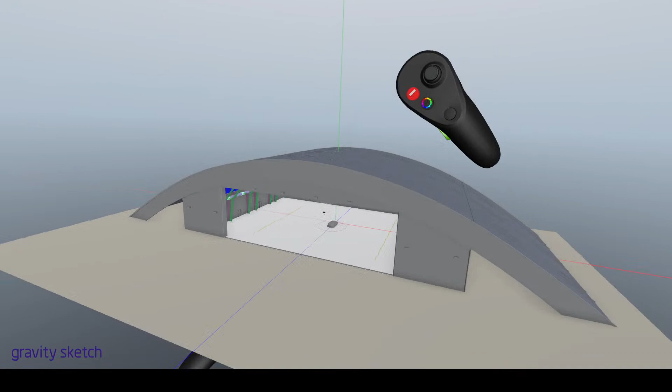The easy way to talk about this is car people and plane people seem to coalesce, and cars and aviation share a similar history of innovation. For me it's personal and professional. When you see something like a Monterey Historics and a Monterey Jet Center, a place where airplanes and cars are shown together, that was the inspiration. I decided to make my own style hangar, and I had already modeled an Airbus 220 Neo, I think, and I wanted a place to park it. So this hangar fits when the ring light is up at the top of the ceiling — it fits nicely, has a couple feet to spare.

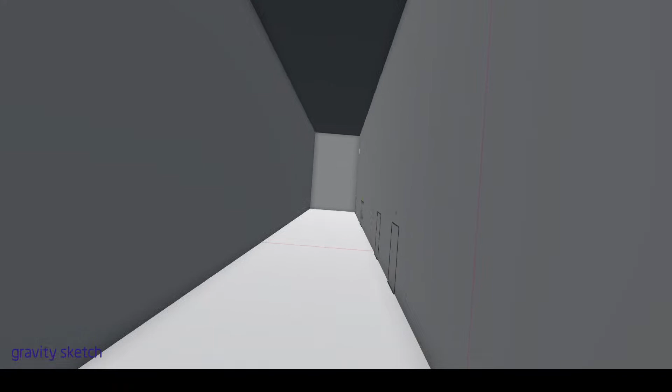Wow, that's cool. And it's got offices for you and I when we want to look down. Actually, I think there is some furniture. Oh, no, there's no furniture, but let me see if I can get that layer. Oh, it's all in one layer. I don't know yet if I have plans for putting in offices and things like that, but it is a fun place to shoot camera shots in Blender.

Yeah, I was just thinking that — I can't wait to see some renderings of this with lighting and everything, to see the scale of this in a realistic scenario. It's amazing. I can tell you it does look cooler in Blender, and that's just because shiny materials make everything look better, things like ambient occlusion and real-time reflection and all that stuff. But even now it looks cool, don't get me wrong, just the sheer scale.

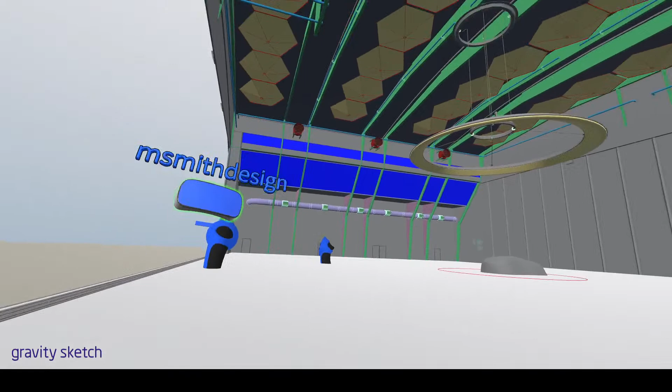If I just put myself at full scale, using the banana to teleport myself here — right now it's as if I'm standing in a full-sized hangar, which is incredible. The car looks like it's actually like 100 feet away, which is amazing. I'm trying to remember the wingspan of the Airbus, but this building is hundreds of feet wide.

So what was your inspiration for this hangar? Were there some references you were maybe pulling from? Did you just go online and find a few things you liked, some different hangars that you enjoyed, or was it something more specific?

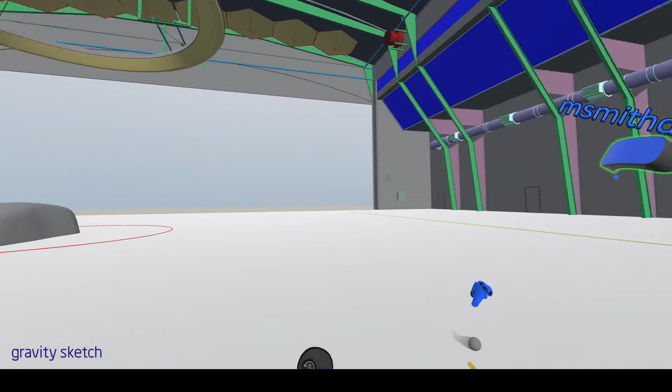Well, I wouldn't put this to the scrutiny of an architect just yet. I did what I thought was my due diligence in terms of the green elements being I-beam and steel. I'm weird enough that I pulled reference for things like what does an HVAC look like in a hangar, what is the fire suppression — which is all those crazy red things up at the ceiling that spit out foam. What I wanted to do was grab everything that felt real and realistic to a hangar, and then go a little further. So the lighting elements for indirect lighting, I haven't necessarily seen those, but I thought it would look cool like that.

To have instead of just row upon row of fluorescent lights, to do something a little different. The ring light is straight up, makes cars look cool in renderings. Right, because you can bring it down low, and you park the car on the turntable in the center.

There's no hangar that really has a turntable that I can recall, but things like exit signs and door handles, whatever it takes to make it feel real. I pull reference from old hangars and new hangars. I'd love for there to be more modern hangars, and I don't know if mine necessarily qualifies as super modern, but it looks very convincing.

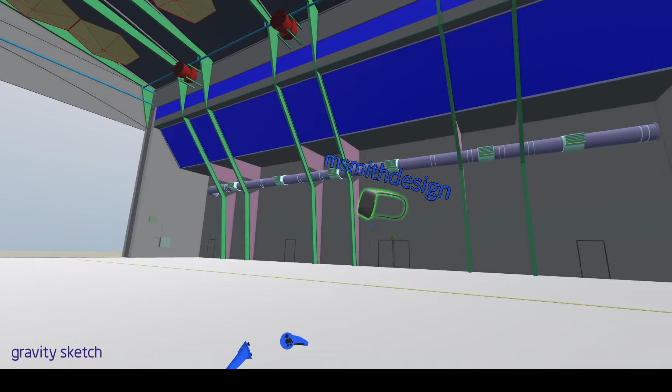I mean, so that's what I was wondering if you had some. What's that? That's a good word, convincing. If it can be convincing, then you've won half the battle.

It's like putting junction boxes and conduit, and lighting, and the piping for the water suppression system, and indirect heating, and whatever it takes. It's just time. And again, that sort of time warp effect of VR, you find yourself doing crazy stuff like those little cones over there.

But those are something that you would find in a real hangar, right? They put them on the wingtips, and they put them anywhere you might bump your head. And ask me how I know this. Well, it's because I worked at an FBO, and I had to clean hangars with the little mini Zamboni.

And so there's this personal connection, and that I think is what drives me in everything that I do to strive for that level of convincing. Well, it certainly does that, and it's really interesting that you actually worked in hangars. So you have a first-hand understanding of what it should feel like, what it should look like, the essence of a hangar.

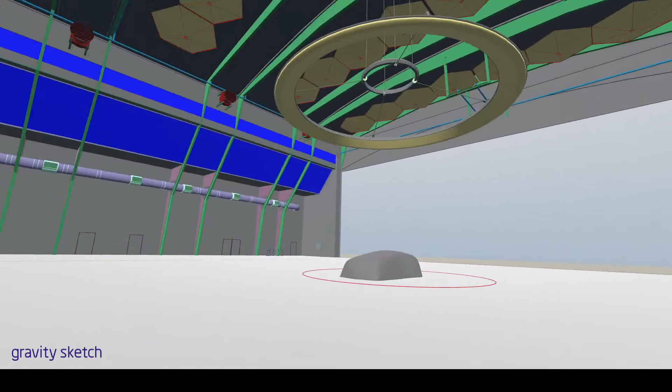I think the hangar I worked in, two of them could probably fit inside this hangar. Really? This is on a much bigger scale. We didn't service jet airliners, we serviced more general aviation type stuff up through business jets, but that's it.

Would you say like a hangar like this would be probably a very large commercial jet hangar? Yeah, again, the Airbus 220neo is maybe one of their smaller jets, but it's quite big, so it's definitely passenger jet size. This is incredible. If I build any bigger planes, I'll have to modify the hangar, but that's okay.

Well, I also clarify, you kind of touched on it a little bit ago, but some people might be wondering why all the different colors? And I think I know the answer, but I'll let you go ahead and answer that.

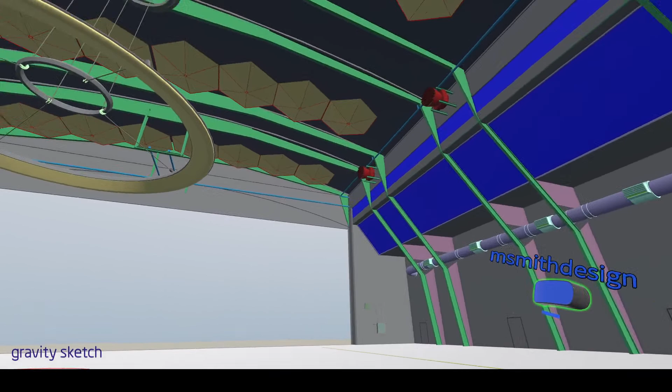Yeah, so that's workflow. It's way easier when you export into things like Sketchfab or even into Blender, having different materials grouped by common material, and then it's via color in Gravity Sketch. I know the same hexagonal light elements that are indirect is going to glow the same as my ring light because it's the same material. I can assign an emissive shader to it, and instantly I've saved myself a ton of selection work.

So it's a... sorry, go ahead. No, it's funny that you bring it up because it's been a hurdle in some ways in getting people into Gravity Sketch. There was a criticism raised one time that the colors look really cartoony, and that's because of how I'm modeling it. So I help myself, right, to get it into my, out of my brain and into the state of tangibleness, and then get it out of here into something that...

And again, to be clear, I don't necessarily need Gravity Sketch to be a full-on render engine, right? Its strengths lie elsewhere, and so these are the things that I have to do. It sounds kind of apologetic, but I like my crazy colors.

Yeah, no, it's great, and we've challenged people. I say, come at me, bro. We're in VR, you can't hurt me in VR.

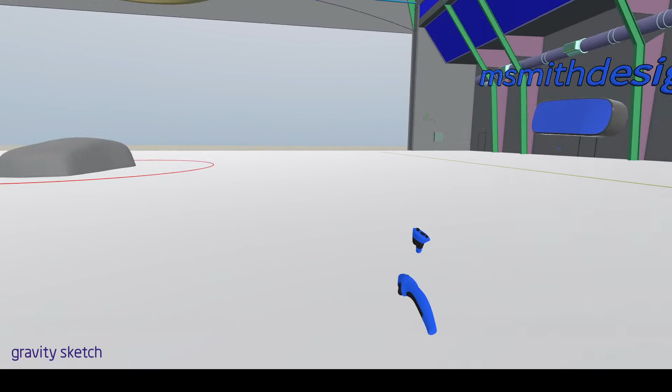Well, we've seen this workflow a number of other people have used. For example, Finrush Taylor, he's a designer, I think, for Adidas or Puma. Apologies, Finrush, if you're listening, I can't quite remember, but he's done a similar thing with his shoe designs, where he adds just different wacky colors to each piece of fabric on the shoe, just so it's easily distinguishable which piece is a different piece of fabric. So it's very logical, makes a lot of sense.

I discovered that Sketchfab has a 100 material limit, and the airplane completely obliterated that limit, so I had to come back in and consolidate materials inside Gravity Sketch just to get it to upload. But that's mostly on me, because I'm literally making green, then slightly darker green, then darker green with a bit of blue added. I'm always fragmenting as part of my workflow, which is maybe not the best way to do it, but that's the way I've done it. I don't know if it's the best way either, but it makes a lot of sense and saves tons of time.

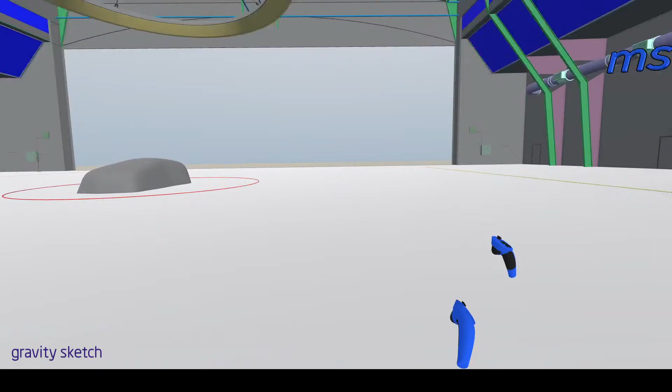I wanted to ask you too - I think you mentioned offices. Would that go behind the doors? Because I noticed there's another compartment behind those doors, behind the hangar. Is that where the offices would go? Well, the offices would be up in the blue glassed area. The restrooms would be along this area down here, and there's usually offices or areas for the maintenance guys. Then the double doors are access to whatever office space is behind that. In the arcing section of the front piece of the hangar, there are these open areas where the tugs and fuel trucks would go.

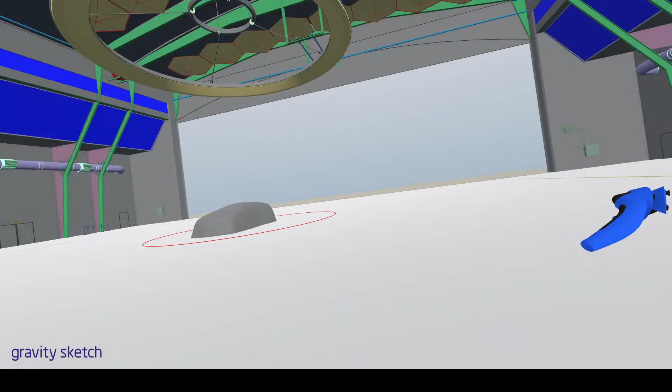Wow, I did not realize those blue panels would be glass - I'm envisioning that as transparent, that's really cool. If I ungroup this I can turn the opacity down. That's how in the default scene the opacity is turned down, so you can actually see there's a dude standing up on the catwalk there. Let me see if I can go look inside - oh yeah, that's cool. I keep thinking, am I giving these people enough space?

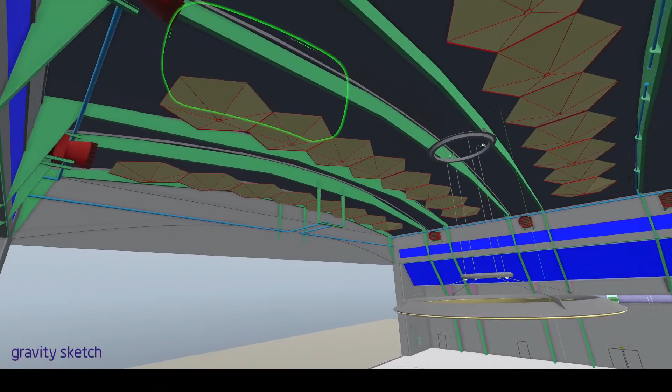Well, that is a huge space. Everything about the scale of this building is a little bit - it's more manageable when you have it in the palm of your hands. That's kind of where the malleability of scale continues to bend my brain, being able to squish this thing down to literally sitting in the palm of my hands and then zoom back to 100%. It's just the best. The beauty of this is it seems like your dream hangar - everything you want, size wise, function wise. It's kind of like you can make it whatever you want.

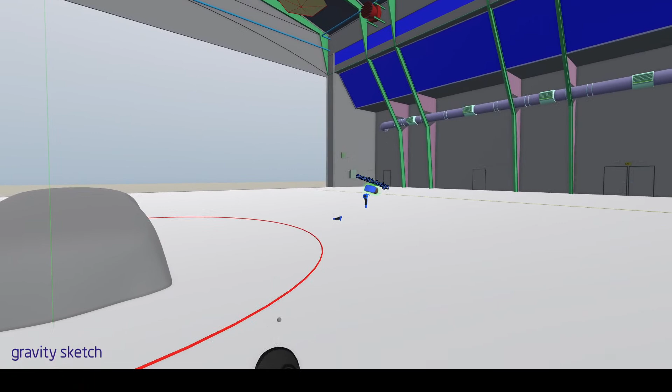I need to ask you something, just a technical question - everything's very nicely, orderly laid out. Were you using a lot of the grid function in Gravity Sketch to lay things out, as well as for the repeating arch of the fire safety panels. How was that done? A lot of it is the axis alignment tool, the functionality of lining up your controllers. And also the array snap feature that's now in Gravity Sketch, where I can create the offset that I want.

I don't actually think it's perfectly symmetrical, but the first two vertical supports are the same offset. Then everything about this is - if you're going to make it once, you're just going to copy it and slide it down, because that's literally what they're going to do in real life. They're not going to make a custom truss support for each one of these - it's just going to be the same thing times 8 or whatever it is. So yeah, it's just a lot of axis constrained movement.

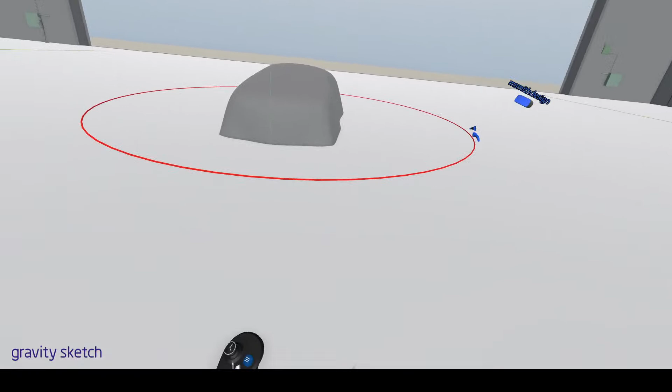That makes a lot of sense, because I've personally been interested in trying out more methodical, measured ways of working in Gravity Sketch. It just looked very precise, so I was curious about what your workflow was. But that makes a lot of sense.

Without any further delay, we've got a covered up car over here. What's that? I did a really bad job - I literally did this right before the session started. No, this is great, this is perfect, because we can make it like a reveal. Maybe if I start to delete, it's gonna dynamically show things as I delete stuff, right? Oh that's right, nice - so I'm just slowly... see, this is a new style of reveal that you can't do with cloth. This is awesome, a subdivision reveal. You're seeing it here first, everyone.

Yeah, I'm just going to delete it. That's going to take too long.

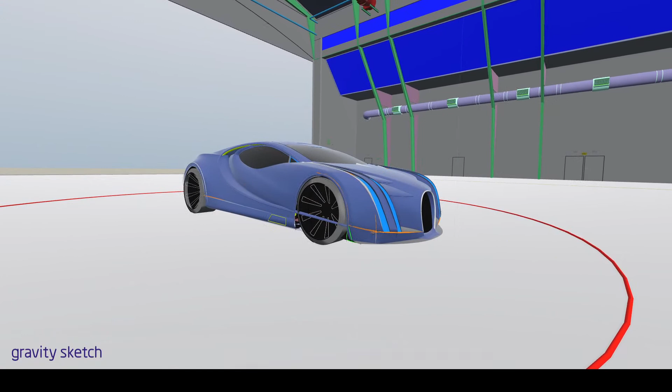So you want to talk about soak time. This car has been in the works for the longest of any project I've been working on, and it's because it's the one I want to get the most right. It looks amazing - in terms of the Zora thing I did and how many iterations I went through converting that from the initial sketchy model to the sub-D refined, that went through five, I think, major iterations. This thing is on a different time scale.

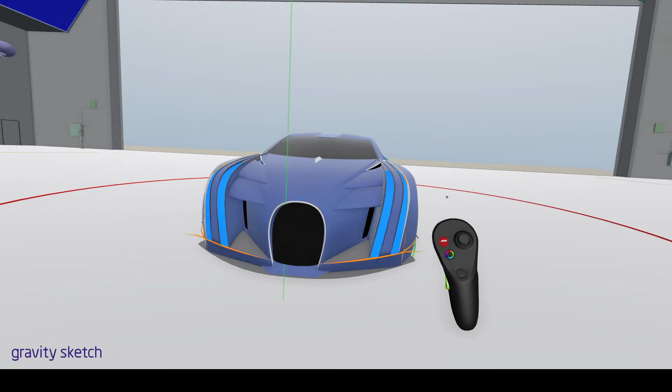And in a way it's the most fun, right? Because I think what I'm flirting with on this one is this idea of craftsmanship. And again, it's not a negative to say that sketchy is too quick - it's that sometimes the longer I've lived with this thing, the better it's gotten. And as long as I keep that trend going and it doesn't go backwards, then I'm going to be happy, and it will have been fun.

And I think the best thing for our viewers to understand is that I've never drawn any of these curves on this model in orthographic at all. Every curve on this car has been drawn in 3D and then checked in 3D. Not even 2D sketches - no 2D sketches, this is all. I could show you the origination scene had the sketchy model here, and I slid that forward, and I said I'm gonna try another one, and I have another one back here, so there's even two different versions of this initial sketch of this car. It's kind of crazy.

For example, this line right there is a line that I would challenge you to try and get right from the side view. The line that results in the side view is because I drew this line in 3D. And in fact, it even - I'm gonna break the...

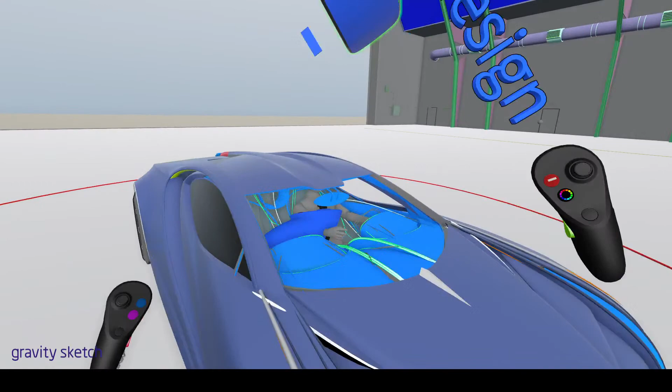Let me see if I can quickly throw some of this stuff on a layer, just so I can expose a little bit of the interior. You see that stuff links up, right? It's because I made my layer. All the stuff links up, it all relates, and you want to talk about spatial awareness and what we do as designers - this is where all the magic is, getting stuff to live well and fit a package.

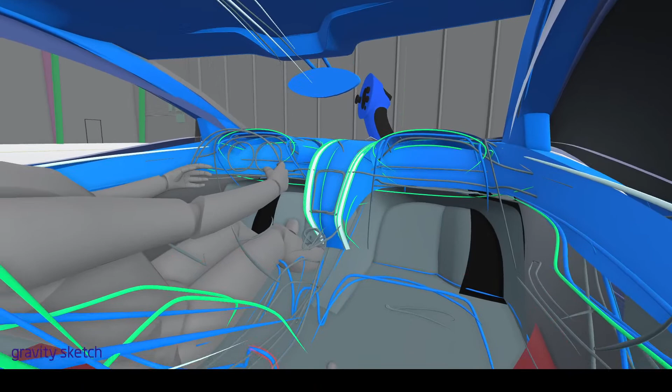And fit people. If you poke your head in, there's a frame in there in the back, which is just tubes at this point, but that may grow into something more exotic. Again, I think this one is the most labor of love kind of project, and the interior sketch was the first thing I did after I picked the winner of the three initial gesture sketches. So if you want to sit in here with me, we can go 100%.

I'll be the driver. But just the things that matter, it's all here, and the outside matters too. But just this idea of - and I'm being repetitious because I've said this all before, but it bears repeating - this is where people spend their time. You hook them, you get them in by the outside, but then you want to make sure where they live is great too. And that's why I started on the interior first before I even continued with the exterior.

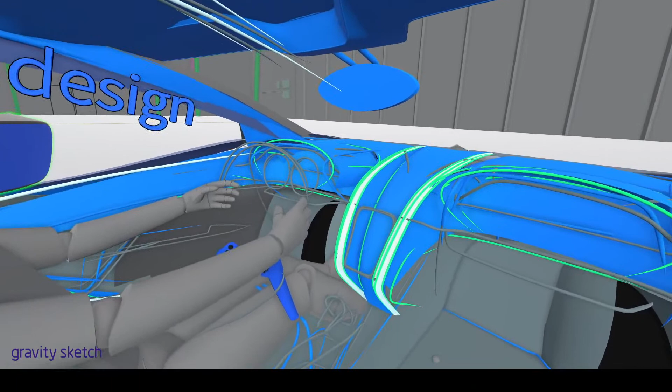And it's to make it a Bugatti, right? Make it look really authentic. And I can draw this because Ford doesn't compete in the market segment of Bugatti. And just keep it fun. I mean, this is - WIP, big time WIP.

I love this, I can see what you're talking about, about everything connecting, and it makes so much sense because when you're sketching cars on paper, you have to do a million little sketches just to see how things connect and how things flow into each other. Whereas you're solving all of that in this one work-in-progress model - one sketch essentially that you're adding on and editing consistently.

I didn't like where that mirror was, so I just moved it. Okay, yeah, but just the flow. I just love it - well, and also the design is just really cool.

I mean, the center console here, would this be some kind of screen? Yep, and it moves up and down depending on the driving mode, and that's cool depending on how frisky you're getting with top speed records and such.

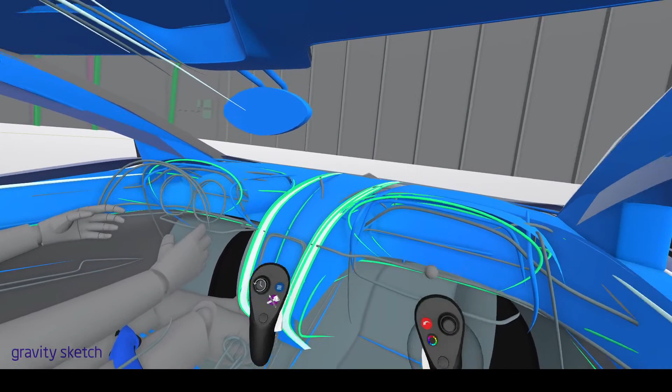Forgive me for not knowing some of the nuances here, but it looks like there's a display here, or an opportunity for the passenger to have some information displayed as well. I hadn't done that, but I like your idea, so you should start sketching what you want to see there as a willing passenger in an ultra exotic like this. I just love the symmetry of it.

It'll just be a grab handle. I'm not going to say the words because they're not safe for YouTube, but yeah. No, but go ahead, keep going.

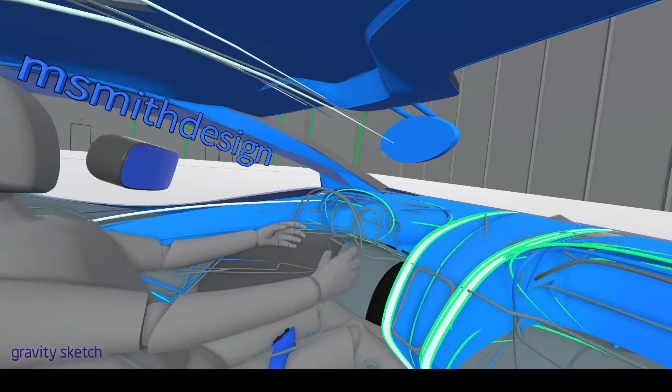I just love the symmetry of it, and what's surprising too—I had seen Bugattis for a while, and then I went to the Detroit Auto Show a couple years ago and saw one for the first time in front of my eyes, and I was very surprised at how small they were. They always look so large in images because of the large, voluminous shapes. I think that makes them seem large, but it's actually a very small vehicle.

Yep, and this is on package and on par with the vehicles they currently sell, in terms of wheelbase and track. I have some ideas for power plants that are decidedly off-brand for Bugatti, but maybe that's where the brand needs to be challenged.

Well, it certainly looks like a Bugatti. I mean, obviously you've spent so much time on it, but when I first saw it before we started the live, I just looked at it and it's like, yep, that's Bugatti. I could totally see Bugatti making something like that, but not now—it definitely seems like an evolution, like the next step of Bugatti.

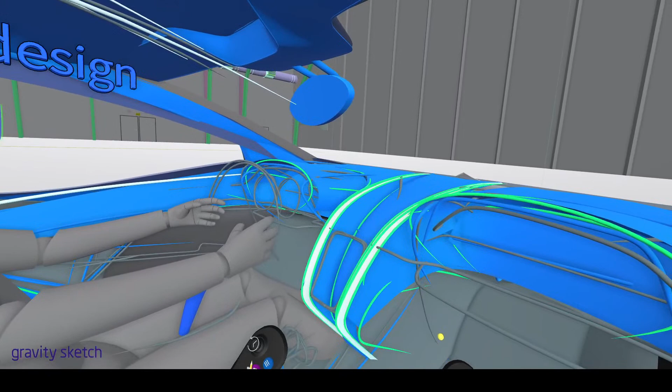Obviously, the goal of every designer is, what's the future of Ford? What's the Ford of 2030, 2040? What does that design language look like? You gotta have fun, and I hope everything I do looks like I'm having fun. If it doesn't, then I'm not doing it right.

Yeah, and just looking at this interior, there's so many—you've got blue lines, green lines. You can see the thought process, and that's just another thing. Not to get too nerdy, but you can see how someone's thinking and what someone is playing with, and so me, as a director, can come in and just look and say, okay, I can see what you're thinking here.

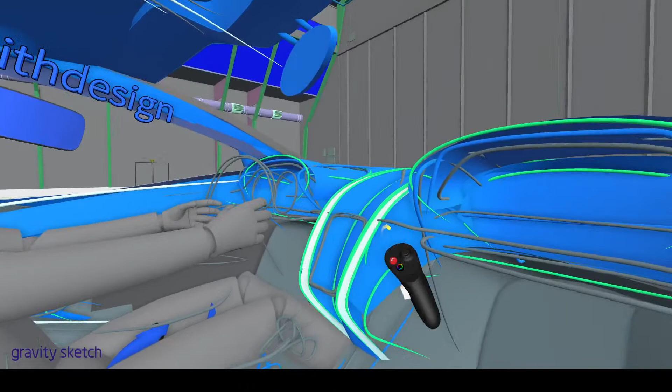Maybe we should go with that, or maybe if we just brought this up slightly, or accentuated this curve a little more. But you have that one-to-one, and you were saying that earlier, but it's just a perfect example of literally stepping into someone's mind almost.

I'm glad you mentioned the colors, because it's not just about differentiating one line from the other—there's a temporal aspect too. The less saturated the line, the older it is. So the gray was probably the original, then blue, then green is kind of the crazier colors, and those are getting more and more honed in on the direction I think I want to go.

To your point—and this is kind of a riddle I've talked about with students—as we get into this bold, digitized future, and VR is going to play a part in that, how do you keep track of or archive this as a thought process? In Gravity Sketch, it's on layers, and thanks for making unlimited layers, because now I can put all these colored lines on layers and say iteration 1, iteration 2, or week 1, week 2, week 3, whatever. Or day 1, hour 1, whatever time scale you're going to work on.

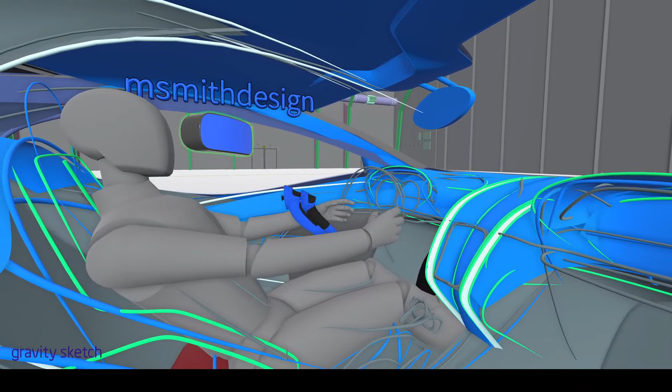Even extending that out—certainly from where I came from, a year or so ago, before this position I'm in now, recruiting—I can't wait to, quite literally, you're an employee of Gravity Sketch so I can't have a job interview with you, but I fully look forward to the day where this is the job interview I'm going to have.

That's something I never really thought of until you mentioned that, but it's so true. You could literally just sit virtually and show, hey, this is what I'm working on, this is what I was thinking when I was doing this.

Yep, and I look forward to that day. How close do you think, how soon of a day do you think that is? Within a week. Wow, that's amazing.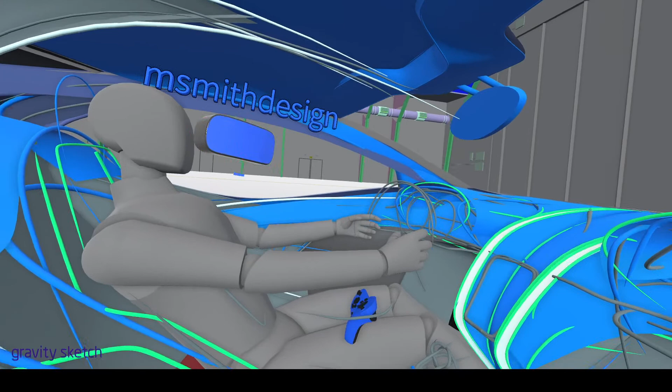It makes total sense, especially from a designer's perspective, a recruiting perspective. Well, and again, it's so funny because I have a lot of these.

I've been having all these amazing conversations with Brian in footwear, and that turned into my new pal from Australia, Bezo, who we talked a lot about in co-sketch, a lot of wild stuff. He's an architect guy, so he's going to actually give me a critique on another house project I did. It's a dream house, kind of an 'if I won the lottery' thing, there's pictures of it on Instagram. It'll be fun to have him tear my house design apart since I'm not an architect, and hopefully defend my choices but also hear and improve it.

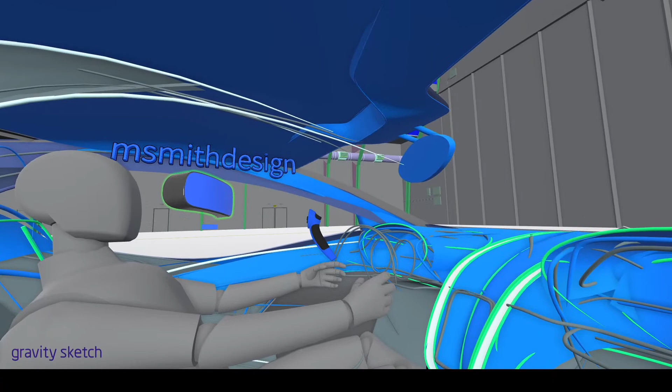In the same way, we've already taken advantage of co-sketch and VR for internships, where it's way more interactive and, I would say, productive, to be able to get your hands dirty without literally getting your hands dirty.

Messy in a sketch, right, before you get too far along. The riddle I've had these conversations with various people about on co-sketch is, how do you replace the sketchbook? Because when we're hiring people, man, we still love sketchbooks, because that's quite literally the best way to see how people think. Can you turn a car around in your head, and can you then get that on paper? Well, what's the new equivalent, right?

What's it going to be? I would argue it's this, you're in 3D. We're going to make 3D cars eventually. I want to see how you can do with 3D stuff. That makes sense, anyway, that's my personal opinion.

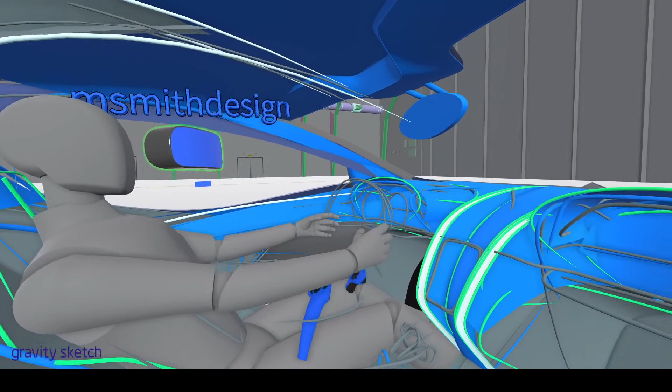No, it makes sense, and I've thought about this, it's been a subject of discussion in school when I was there, talking about sketching versus 3D. As you know from Matt Whitby, working with him, VR and Gravity Sketch was very much part of the curriculum, and there was, I think, a constant back and forth, at least on the student side, of how much am I sketching versus how much am I just jumping into Gravity Sketch and spending most of my time there with 3D line sketches in VR.

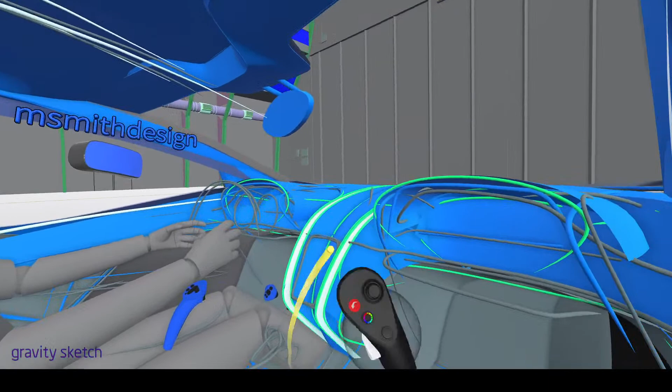At the end of the day, the conclusion we all came to was, if it's communicating our concept and it's in 3D, then that's even better. It's doing what 2D sketching historically was supposed to do, which is communicate your idea in 3D. But now, obviously, it's just the next evolution.

You can still go back and forth, right? There's doing a 3D doodle, then drawing it at the breakfast table, making refinements and adding them back, which is completely backwards to the concept. Or I've done ones where I did the full car and then finished with renderings in 2D, because I live in a realistic world where people expect you to have stuff up on the wall. That's fine, it fits within that entire ecosystem of creativity.

Well, let me ask you something. I think that shouldn't be intimidating, I think it should be emboldening for people to just get into it, just try it, see where it fits in your process. If you're the person who likes to just take it this far, awesome, that's all you need to do. Just take it as far as you want to go.

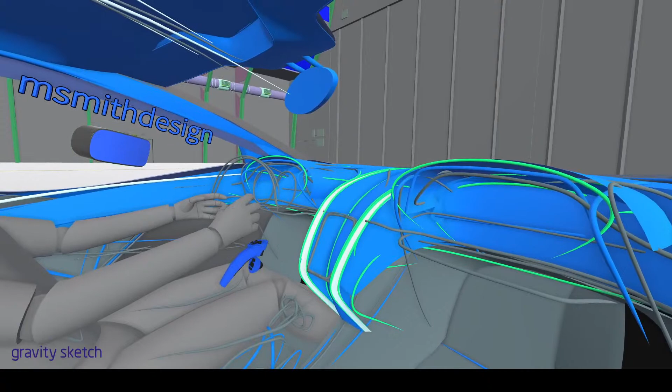Yeah, absolutely. Well, it kind of makes me think of something, and I'm curious to get your thoughts. Do you think that there's a stigma of using VR in the automotive industry?

I think it probably translates to other industries as well. But just out of your own personal experience, because you mentioned people still like to see 2D sketches, which I love. They're pretty to look at, right? But you did say earlier that we don't manufacture pretty images, we manufacture cars, 3D cars. Is there a stigma, do you think, to VR and this whole new sort of tool that's emerging?

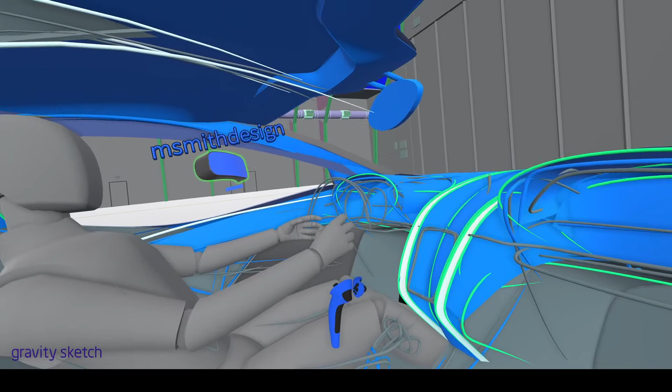I would say if there's any stigma, and I'm trying to think if stigma is too harsh of a word, I would think stigma might have applied before March of this year. It certainly is, not too surprising to hear that COVID-19 has really drastically altered lots of different landscapes. Because of the inevitable shift, and the way we're finding successes in virtualizing more of our process, the stigma, if any, is crumbling.

I would say if there's any sort of stigma, it's just that sometimes people see new as risky, and then others see opportunity. I think it depends on what your mindset is. I was certainly in the mindset when I saw the first video that Gravity Sketch put up on YouTube, I said, I got to play with that. And the next day I emailed Seyi and Daniela, and they said, let's have at it. That's been a crazy roller coaster ride to here until now, and it's going to just keep going as far as I can tell.

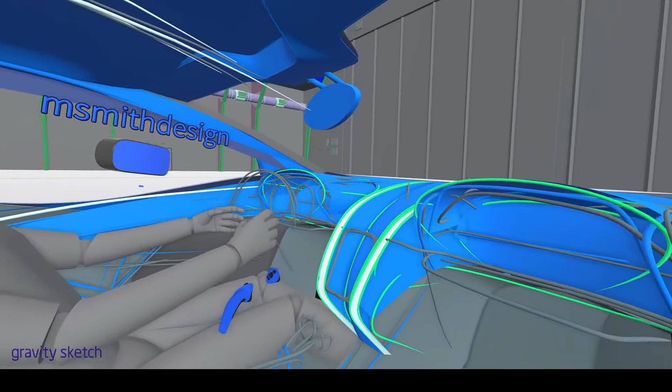It's incredible. You mentioned some landmarks there, COVID-19 obviously, and I think the Quest has definitely piqued a lot of more people's interest in VR in general. But it makes a lot of sense.

Well, go ahead with that, right? Because you mentioned it, there's a lift, a lift of computer and hardware, software in some cases. And I think what Quest represents is the lowering of that lift, because it's this untethered HMD. You just pop it on your head, and now you're off to the races.

I certainly love the idea of hopefully when we get back to traveling around and talking to our customers at different events, to have that on an airplane, because now the bosses love that too, right? Because you can keep being creative, because the security is inside your headset, versus you can't work on a laptop, and sketching in an airport is not really condoned. But that little pivot of, well, now the creativity is next to my eyeballs, again, it's a chance to rewrite the script.

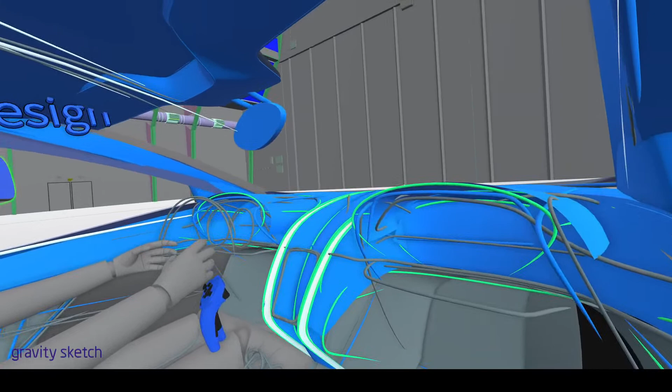And I think, if COVID has any silver linings coming out of this, it's let's take everything we've learned and really thoughtfully change the way we do things.

I think you're exactly right. We actually saw, funny enough, someone tagged us in their story on Instagram, and they were literally sitting in an airplane using the Quest, doing some sketching. And it's just as soon as someone does that, it breaks the barrier. Everybody's like, all right, we can do it on airplanes, and people realize it's anywhere, you can be anywhere and do this.

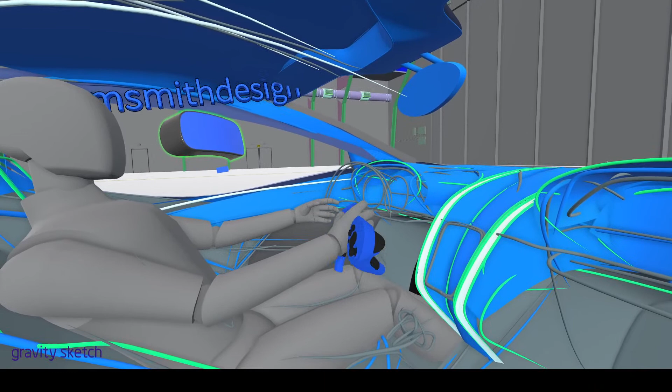And I think if there's any sort of company level stigma, it breaks down as societal acceptance gets bigger too. So the acceptance of Quest and the broadening of people's VR horizons with a product like that is only going to help lower any perceived barrier. I feel weird thinking, if I bring the Quest to spin class, what are people going to think of me? But a lot of times what I tell people is, look, we're in VR, I have no idea what people are looking at me, or I could care less, because I'm having fun.

And I think that's what you always have to go back to, as soon as it's not fun. Absolutely. And what's funny is, just to tie it back to sketching, I felt that same way whenever I'd be in the zone sketching on a piece of paper. I just kind of would zone out my environment. And with VR, obviously you're covered up so you can't really look around, but I think it just further reinforces that focus mode that we were talking about earlier. You're just in your own world of creativity, making things, and everybody will see, hopefully at one point, what you've been up to.

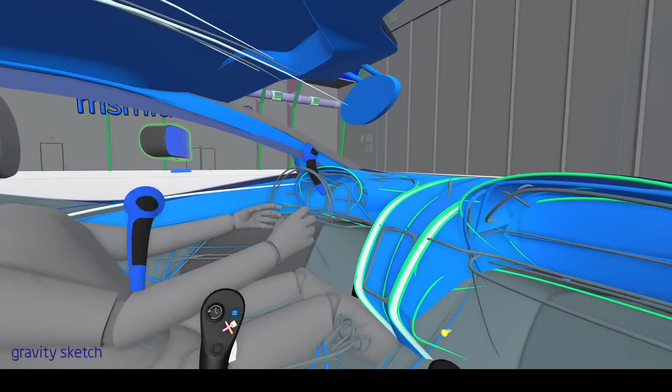We've been talking, but I know you have some other stuff you wanted to show. Let's pull the airplane in, since that's a completely different mode of transportation. I know people would love to see that, since you had it in here earlier when we were getting prepped, and it was so cool.

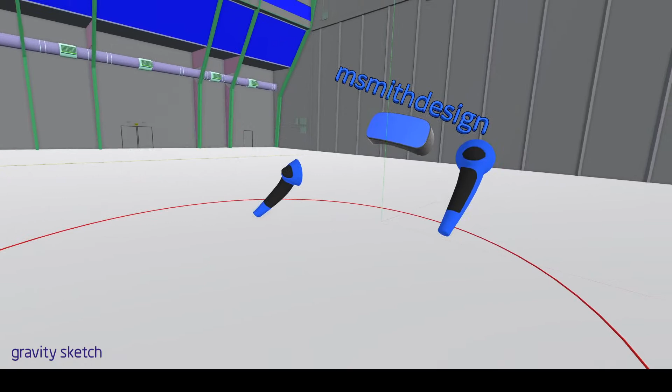Let me lock this layer so I don't delete the hangar. I want to delete this because of the part count — I think it'll help the loading of this airplane, because I went a little crazy on buttons and also used the text tool, which creates a lot of polygons when you make text.

And it's called RV. So continuing with the theme... I'm just going to make sure.

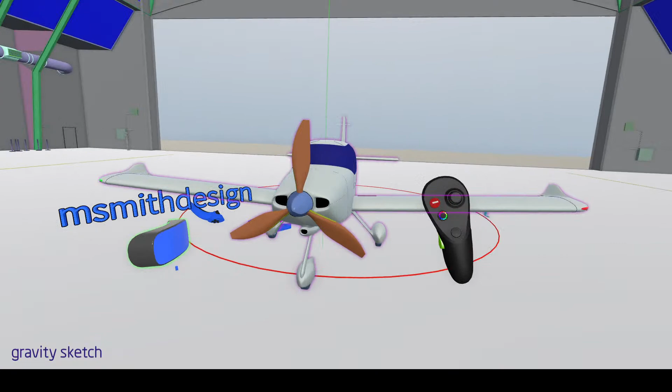Beautiful. It's a little nose-low here, so let me tilt the nose gear back. There, now it looks like it's on... let's see, do I still have that layer? Yes, I have it, so I can put that onto that layer. Actually, we could do it as slightly transparent.

I love planes too, as well as cars. If you want to talk about continuing the theme of dreams, this is a dream airplane. This is a Vans RV-10.

I'm going to delete these because I have these crazy polygons here — oh man, it just moved them. This is an emissive surface when I take it into Blender, because it's not a real digital screen, and I can give it a glowy effect.

But if you want to talk precision, I'm going to say I haven't seen any other 3D model of an RV-10 that's this dimensionally accurate. It's down to the actual instruments — there's an avionics company that makes this, and when you have good reference, you can make good models.

These are the actual screens, right? It's all dimensionally correct. The only stuff that's unique is because the RV-10 is a kit plane — you build it in different sections, and things you have creative control over are stuff like the layout of the instrument panel.

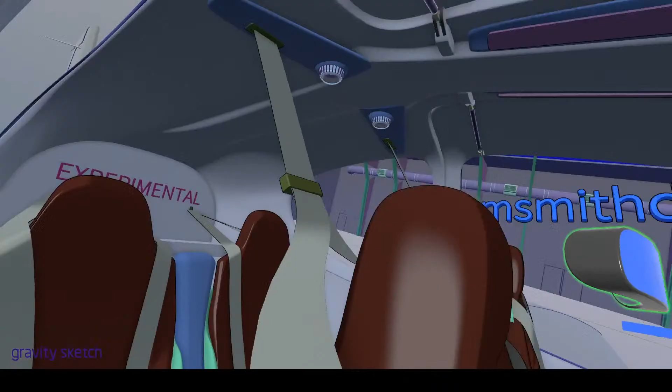If you zoom in here, you can see I'm cheeky as well — there's realistic low fuel, master caution, battery merge warnings, and an eject button in this plane, even though you don't want to eject in this plane.

In terms of what this is good for — this is good because I can get my wife into VR and have her sit in this plane and say, wouldn't you like to have this plane to fly you, me, and the kids around the country? It's a selling tool, a sales tool, exactly.

Because I want her to have a realistic experience, I'm the guy who puts the static wicks out on the wingtips, and gives them a little bit of droop because gravity is a force we have to contend with.

Down to the last detail. Yeah, this is awesome. I'm a little bit crazy. You can check, there's actually LED lights here in the wingtips.

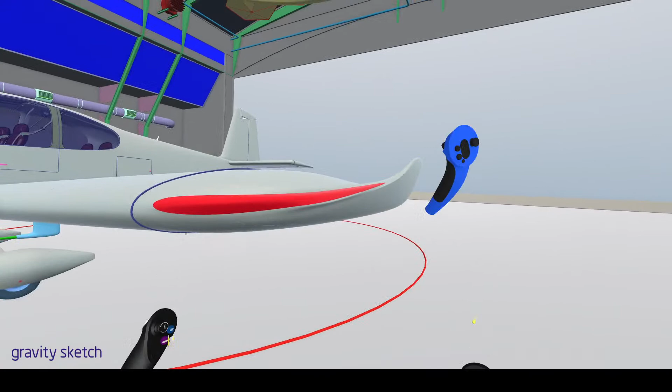Yeah, wow. And again, so the wingtip, from this cut line outboard is stuff you can do whatever you want with. It's the stuff inboard of that you can't mess with because that's all strictly aerodynamics. Well, right. I sat here and said, I like the look of the wingtip on a Diamond DA40, and I like the look of the lights they have on a Cirrus SR22, so I smashed those together. That's awesome, it's kind of a hybrid lighting scenario and wingtip, right?

Yeah, it looks so cool. I've yet to get this into a wind tunnel, but my hope is that it's going to give me a little bit extra cruising airspeed. I mean, just visually, it looks very aerodynamic. It's awesome, I love it.

I was going to comment that the lights looked really cool, integrated into that sort of swoosh shape. But I mean, I'm just amazed at the detail of this. I saw this on Instagram when you posted it, and of course the renders are great, and you get really into the details and show the interior. But just until you get in VR and really start looking around, it's amazing.

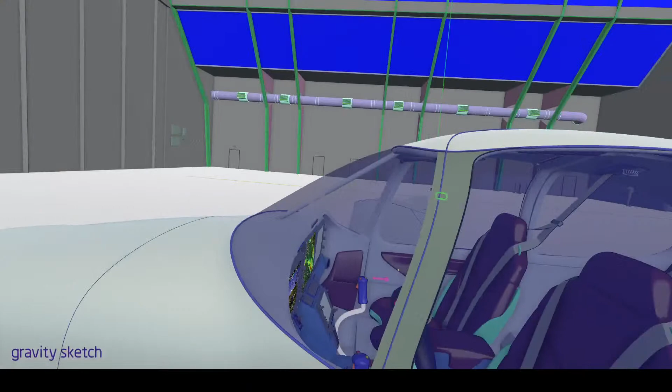And you were kind of touching on it earlier, but the customizability of these planes was one of the main motivations you had for taking on this project, right? Because you knew that every piece you could control. You could somewhat have a version of this in real life. Yep, in real life. Yeah, indeed. And which is just awesome because it's a validation.

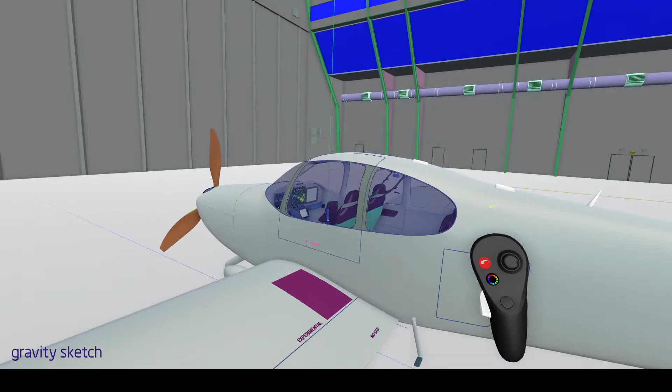It's complete one-to-one, 100% validation of what you could do, and basically see it for yourself, and be like, yep, that's what I want. And then obviously the next step is to make the move and get the same thing. But I have my fingers crossed that it's the same effect as the basement, the same effect that we anticipate and we're trusting is going to happen with the cars that we do.

It's this, you've lived with it before you've lived with it. Yeah, exactly, that's what it's all about, right?

We haven't even gotten into this idea of when I put on my HMD and want to do something design-wise for somebody else, I'm in fact gaining empathy for them just by virtue of putting the HMD on, because I'm now experiencing this object through the eyes of the customer, in a way that is completely different than sketching on a piece of paper. Yeah, the empathy, that's another good point. It's the empathy aspect, and just understanding, one-to-one, what's going on basically.

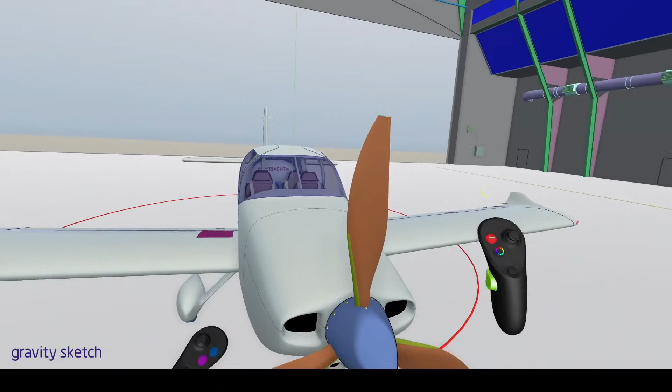So if you check out my Instagram, you'll see I've already started it. It's somewhere on the coast of Oregon. I took a screenshot from Google Earth of a straight-down view, and then I wrapped that onto a texture onto a subdivision surface. And morphed it and added points and made it into topography, best as I could guess for what this actual coastline of Oregon looks like.

And then I was like, okay, now I've got to build my house here. And then it's a two-stage, it's got like two levels. It's bonkers. And it's all one-to-one.

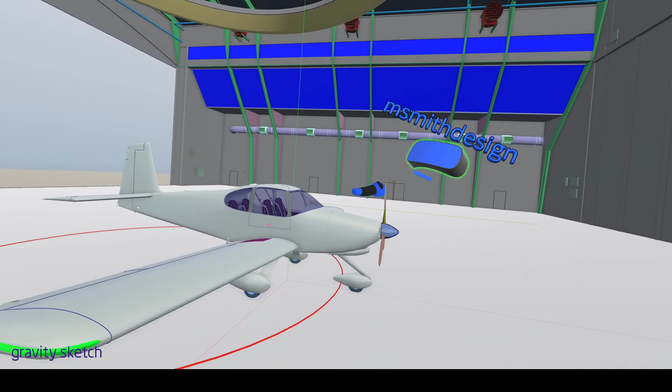I can't wait to report back my progress with Bezo, who again is an architect, and he's gonna pull me back and bring the reins in to say this is obviously the work of a creative, over-creative mind, in terms of what you can get away with. But it's the same thing as kids when they just start sketching cars—have at it, have fun, and when it's time, you'll have the level of realism added to your skill set, you'll need to get a little bit more realistic. And at this point, I'm just a newbie, wannabe architect until I gain additional knowledge.

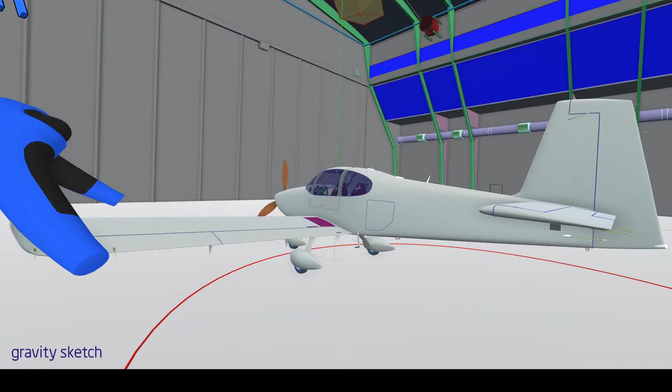I can share with you, I had my first session designing a shoe with Brian Rinella from Reebok, and holy moly, I learned so much in that session. Not only the semantics and the terminology, but just to have him, as I'm moving stuff, say, I don't know about that, or you might want to consider moving this.

It was completely mind-bending, right? Wow, I'm not a shoe guy, but I had a sketch that I did many years ago, and we're going to have a go at it. I'm going to learn a lot, and then the thing we do together in co-sketch is going to be a result of that. It's going to combine both of our brains. It's going to be absolutely wild.

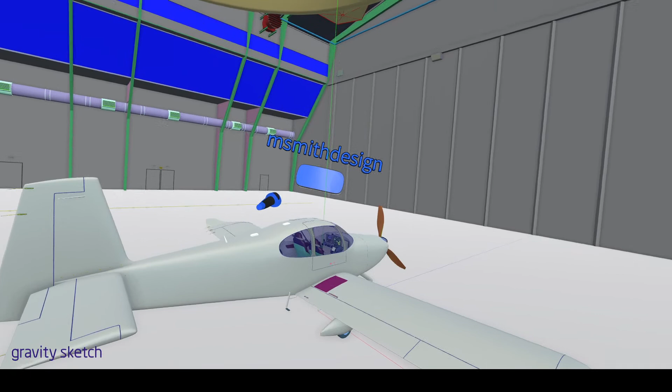But that's such a cool thing, working with someone who has expertise in another field, learning the ins and outs and the terminology, the lingo. It further broadens your repertoire in design and your ability to express yourself in more ways. I'm sure you learned things, even from shoes, that you could translate into automotive as well, ways of thinking. And for the person who made the comment about the dream house, once I go a couple rounds of boxing with Bezo and we clean up my design, maybe he and I should get into a co-sketch session and he can tour the house. Yeah, absolutely. Well, hear that, Calvin Kim. That's an open invitation.

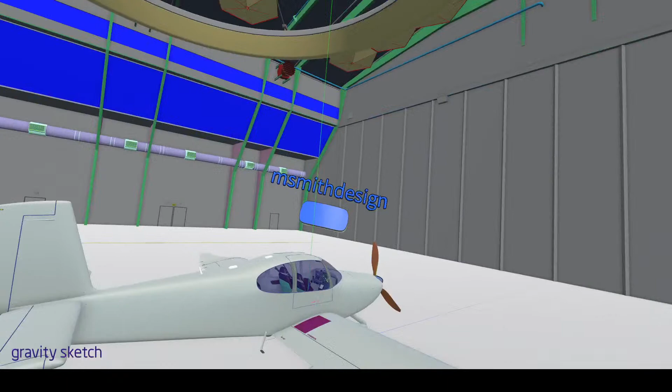That actually brings up something too. If you're ever interested, it would be cool to have a live sketch session with you as well on our Live Sketch Wednesdays, whenever it fits your schedule. It would be super cool to have the community learn a bit about how to approach vehicle design. That's something I've been thinking about, haven't actually brought it up, but we can maybe do that in the future. That's another example of why this co-creation is so powerful, you get these cross-platform, cross-expertise experiences. Somebody can come in as a shoe designer, you as an automotive designer, and see what happens. Extremely powerful.

Let's see, there's someone else here. I think the same person, Calvin Kim, says, 'Stay tuned with my channel, I'm making the new Bronco in an extreme detail version. Hope you get to see it, Mr. Smith.' Cool, yeah, well that's cool too, I can't wait to see that as well.

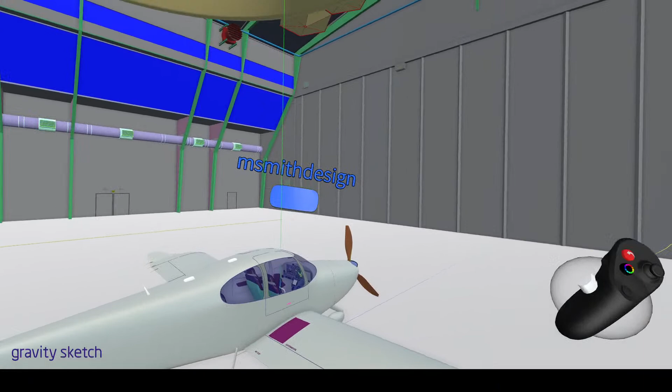Let's see. Okay, John35 says, 'Does he make this only using reference images? Because the details are amazing.' So I guess they're asking how you executed this model in Gravity Sketch.

Yeah, so I tend to make a reference room. If I'm going to make an airplane, the style in which I make it is different than I might do a car. Because a car, I've done from a front three-quarter, from side views, it doesn't matter, it sort of absorbs any technique. To do something dimensionally accurate like an airplane and really get it right, it would be considered more box modeling, having lots of orthographics.

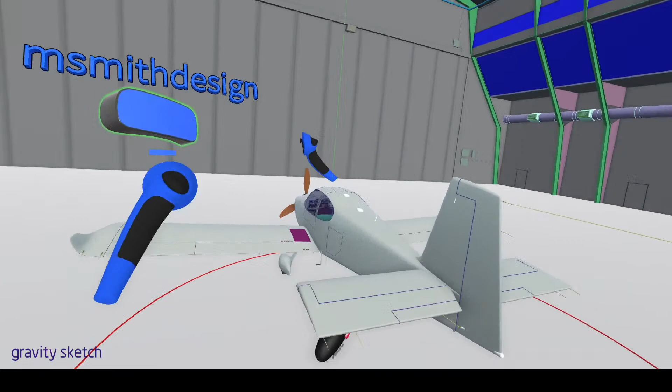It was all available from Van's, and wow, the aspect of this being a kit plane is that there are many people currently in the process of making one of these airplanes. If you want detail pictures, it's all there for you. So many people document, and you can read their build logs down to the rivets, you know what I mean? In terms of knowing this airplane, having created this object, it's about having done the research.

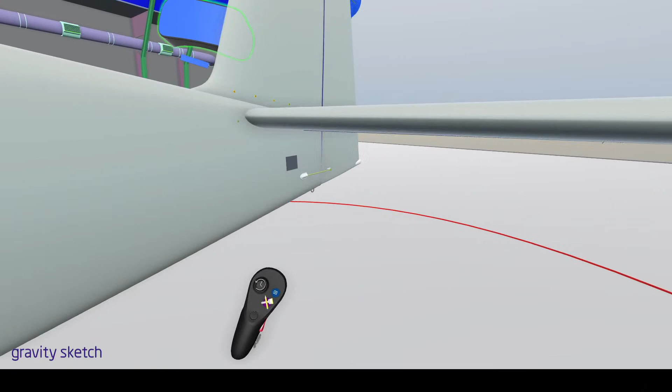This is typically what people build first, right? Is this or the vertical stabilizer? Yeah, and how it's all riveted together, this is all aluminum, and then there's this collar of fiberglass that goes around it, and it's screwed in. That's why there's screws there, right? And so the detail is all emergent from the process used to make this plane. But yeah, a lot of orthographics and a lot of pictorial reference.

Again, there's a wealth of it in the world in terms of this type of airplane, because there are people making tons of these all the time. Wow, that's incredible. It's always easier when you have just a wealth of evidence or reference like that. That way, there's not much left to interpretation. And then the beauty is that when you have all the reference, then you can interpret it or change it to your tastes, as you've been talking about.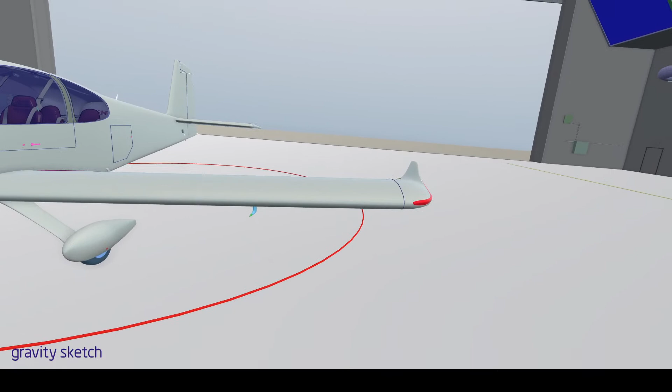And that's, again, the examples of the seats, the rudder pedals - they sell a bunch of different styles of rudder pedals. It's really fun, the control stick. There's guys that put full-on fighter pilot style controls on the yoke - it's not a yoke, it's the control stick. And each one is different, and that's what makes them cool. They're different but the same - they have the same bones.

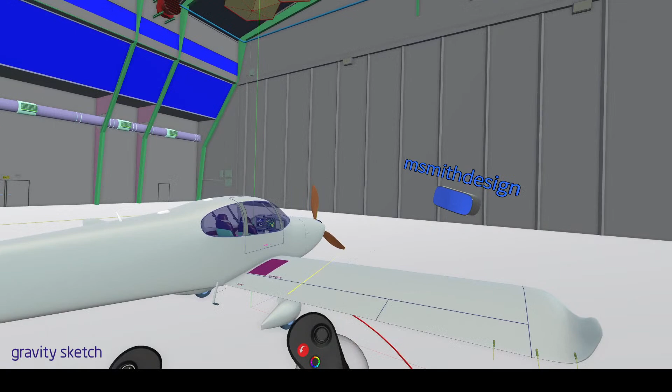I'm gonna have to look these up, because I actually wasn't familiar with these airplanes before I started talking to you about it. But I've also been into planes throughout my life, just externally - I'm not an expert, but my grandfathers were in the Air Force, and I think hearing their stories, talking about their times flying around the world, and their favorite planes, it just got me super into it.

I love the world of flying and the flight and just these machines that are very beautiful but completely driven by engineering, and functional pieces of art, and just looking at this plane and getting into the details. You really appreciate, as you've already mentioned, just what it takes to put something like this together and what makes these things work.

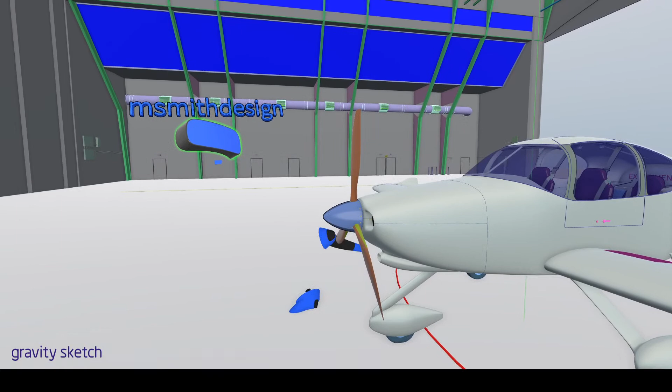And I would say airplanes is kind of a nice thing to be enamored with, in terms of where this is all going. As we get towards full BEV - battery electric vehicle strategy - sorry, I'm not trying to use acronyms - when you go battery electric, the things you need to worry about are aerodynamics and weight. Well, guess what's been worrying about aerodynamics and weight forever? So to know these things, to know these objects, is only going to help you in terms of the pool of reference you can draw on in your brain.

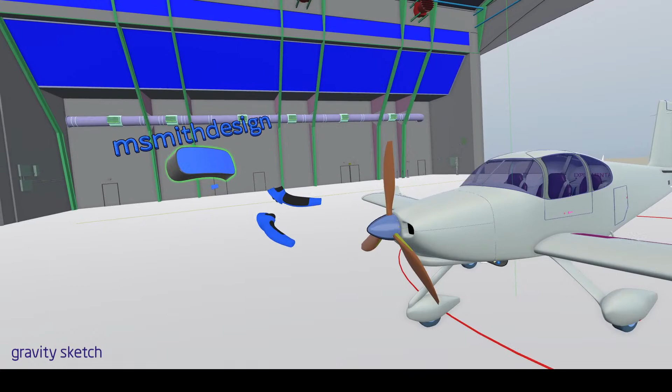The more stuff you grab - and I think that's, again, to keep swimming in this circle - Co-Sketch allows you to bring different voices into the conversation. People who come up through design school with different backgrounds, a personal experience there. And there are others where the mashup was design and marketing, design and business, design and whatever. That sort of mashup isn't something to be scoffed at - it's to be celebrated.

That's something we've discussed internally - co-creation and the kinds of conversations that will be had, because obviously co-creation was an evolution to allow more designers into VR, but I think quickly we realized, through your experiences, what if a marketing person comes in and starts looking at this stuff? Someone on the business side, the sales side - everyone, it's just a space. Everyone can contribute some angle of knowledge to what's being talked about, and it's absolutely a big ditto to everything you're saying.

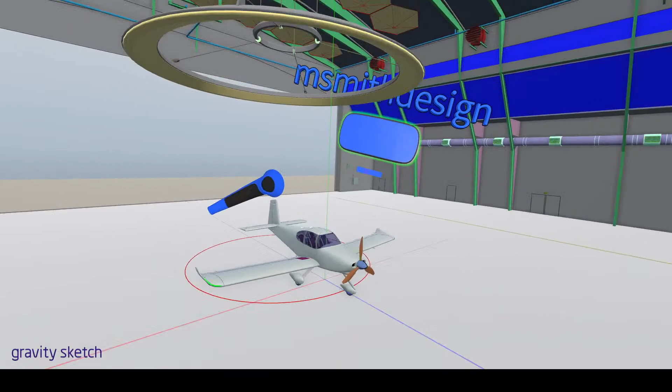Now that I have this model, if I grouped it together, we could fit how many RV10s? We could count how many RV10s we could fit in this hangar. Oh my gosh, wow - trivia poll! Probably a lot - whoever gets closest to the guess. Everyone guess: how many RV10s could you fit inside of this hangar?

Let's see - oh, James Robbins says thank you for the tour of your models, really great stuff as always. James and I - he's another guy who's been here a long time. If you check out James's stuff, he's got a ton of content if you want to get into gravity. He's got some great tutorials on YouTube and workflows if you ever want to learn how to make vehicles in VR Gravity Sketch.

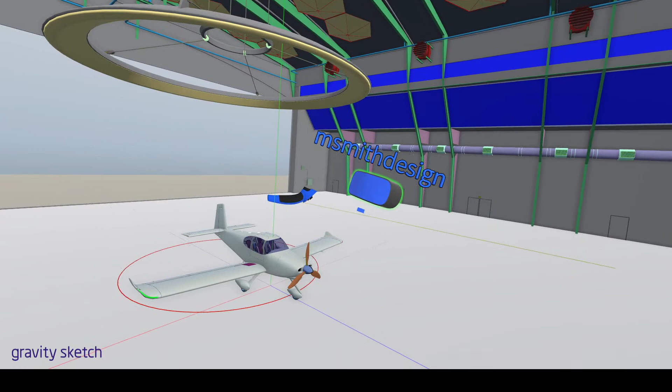Well, we are getting - sorry, go ahead. On that note, Bezo, the guy from Australia who I co-sketched with, he's the one from Discord who inspired me to consider what I could add to the community, and it's going to manifest in some YouTube videos and tutorials and stuff like that. I'm not going to tread new ground - I'm going to stand on the shoulders of the James Robbins giants. If you want to learn, go to his stuff and learn that, and I'm going to see if I can add in different pieces in different places.

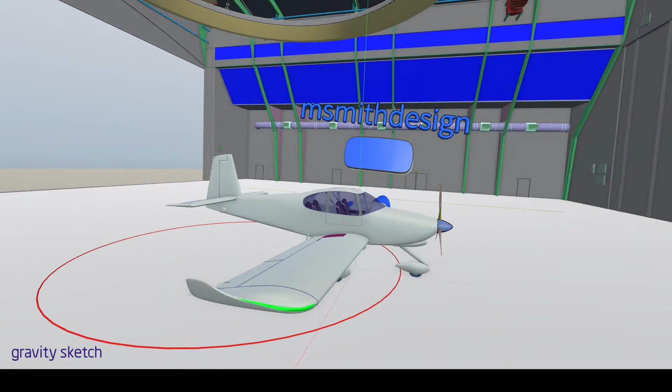In terms of what I know and what I've done and what I can help, absolutely, the community—I can't wait to see stuff like that coming from you as well. I've admired your work, and you have tremendous experience, so I think everybody in the community will love that.

Well, I know we've gone a little over time here, but it's been jam-packed with insightful knowledge and discussion, and some amazing work from Michael. So, Michael, if there's any parting advice you would give to designers or artists watching, anything you've learned that's really stuck with you in your career, we'd love to hear it.

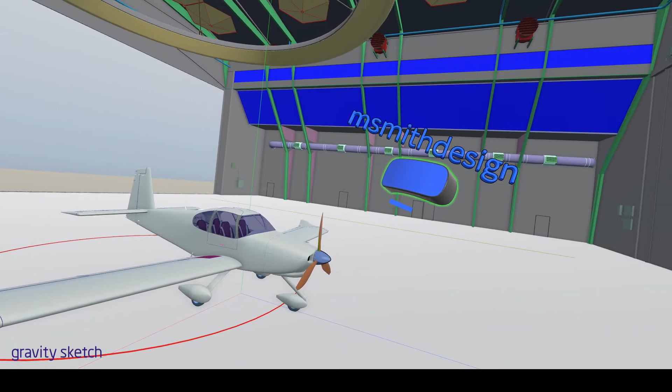Well, it's going to sound cheesy and easy to say, but: always be learning. I'm not a young guy anymore, but this is like a bit of a fountain of youth for me—always jumping into something new, both personally and professionally. It's been crazy, so always be learning and always be on the lookout for what could be next, and how to smash together different softwares. I've very recently started getting back into Blender, and it's just bending my brain what you can do.

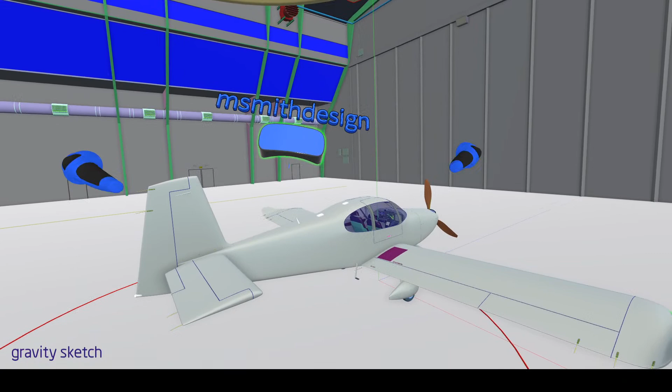For example, if you knew your output and wanted to do a 360 turntable, now I know exactly how to take this hangar and this plane, get it into Blender, and do an animation. It's all because of the videos available on YouTube and online—the resources out there are tremendous. So if you're stuck at home, which unfortunately we kind of all are in the United States, take advantage of that time. Go find some other tool, find something brand new, and push it to its limits.

The day I started playing with Gravity Sketch was unfortunately the day I stopped playing with Tilt Brush, but that's because the amount of potential I saw in this particular software was beyond what I knew Tilt Brush was going to be able to give me. So it's about keeping your eyes out for how to keep expanding the state space, or the potential space, for what you can do with your creativity.

Well, that's very good, and I wouldn't say that's cheesy at all—I'd even argue cheesy is good. So yeah, always learning. That's a great piece of advice, and we're always learning too, so thank you.

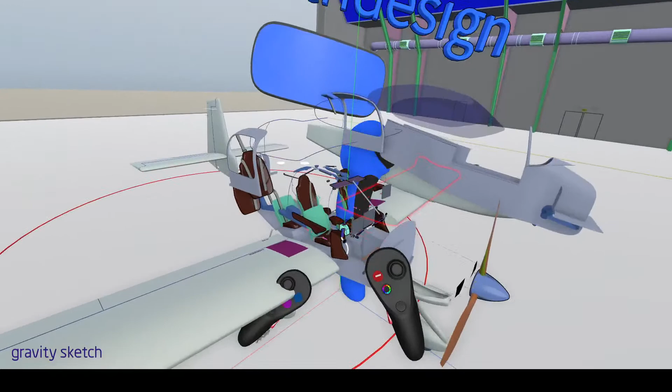Oh yeah, he's pulling some parts off of this model here—that's super cool. Wow, you can see all the inner workings there too. Let's see—wow, yeah, that's cool, it's awesome, like an exploded view.